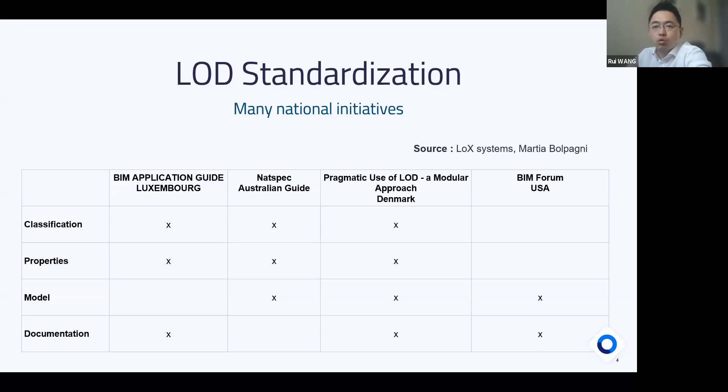So you can see there are very different definitions from different standards. But even each project or each company has their own definition of LOD. So that's a little intro about LOD. What is LOD? It's about classification, properties, model, or even the documentation.

Okay, so secondly, I want to share with you our objective about LOD, simply with the BIM&CO experience; we have been working on this topic or this technology for about 4 or 6 years. So firstly, the objective about LOD: it's a set of data by profession. That means each profession has different information requirements or even geometry requirements.

For architects, engineers, construction, or even project developers and project owners, they have different definitions of the information requirement. Each profession, even for the same object, will need different geometry and different properties. Even for the maintenance stage, they will need documentation to do the installation and maintenance of the objects. So that's one of the objectives. It's a set of data about different professions.

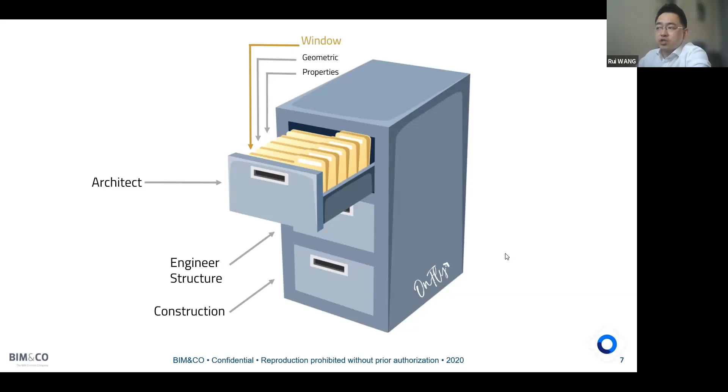So the second objective is to define the LOD as a set of data by project phase. That means, of course, maybe you are all doing projects, so we all know that across the different stages, from the concept to the design to the operation, even the maintenance, we need a different level of development of the content.

So how can we manage, during the whole project or for the same model, the different LODs with one platform, or how can we follow the change of LOD during the project life cycle? So we are looking for maybe a solution for a common data environment, etc. So let's talk about the problems we may have.

Firstly, we understand what the LOD, the level of development, is. Then we see the two objectives. We define LOD, we need LOD for different professions and for different project stages. We all know today that there are many existing standards or definitions about LOD. So that's the first problem about the LOD.

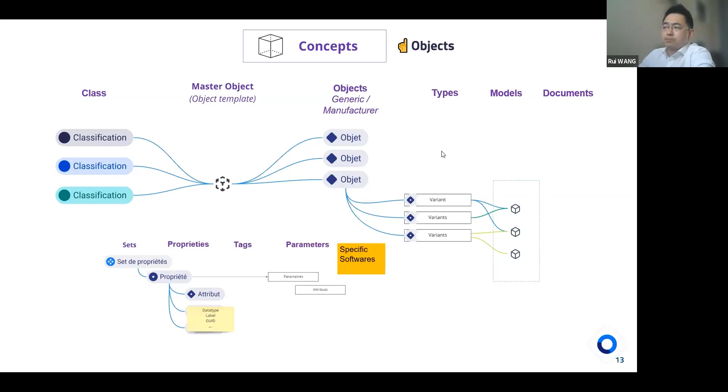So how can we deliver a master object into a project? A master object can be very complete, but of course you can enrich it stage by stage, even project by project. For end users, we are developing different plugins, such as a Revit plugin, Tekla plugin, Rhino plugin, etc. With these plugins, you can easily get your model with the combination of LOD information you need. You select the LOD, and then you get the different types, even from different classifications, the right property information, and the documents linked to a product, all from the master object.

So at the project level, our vision is to deliver the right object with the right information to the right people at the right moment or stage. That could be an interesting shared environment for everyone. We have different roles: BIM managers set up the definitions of your LOD, and end users just select the LOD level and get the right data and the right geometry into their project. So that's our vision.

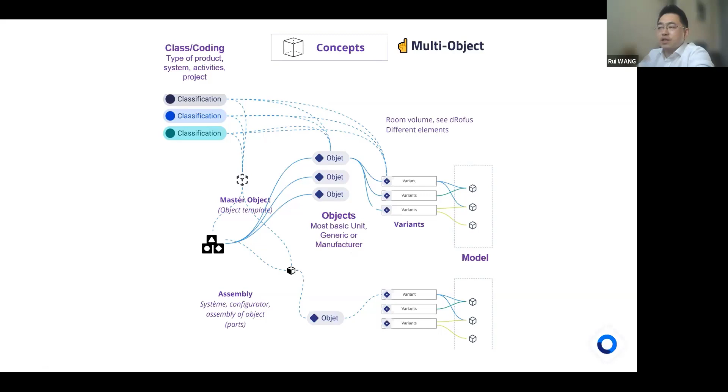Then I want to share with you how our solution looks. Firstly, in our solution, we have a feature named property set. Using this set, we can define the LOD as tags.

You can set a property set, name it level of development for example, and give different tags for LOD 100, 200, 300, as subsets to attribute the different needs or different level information, geometry, or document you need for your property set LOD. So that's the first step, defining from the high level what your concept is.

Of course, the tag is not only used for LOD, but can also be used by profession, by discipline. You can define this property set for electrician, this property set for architect, so the right person uses the right property set and gets the right data. That's all up to you. Today we're showing an example about LOD since we're talking about LOD.

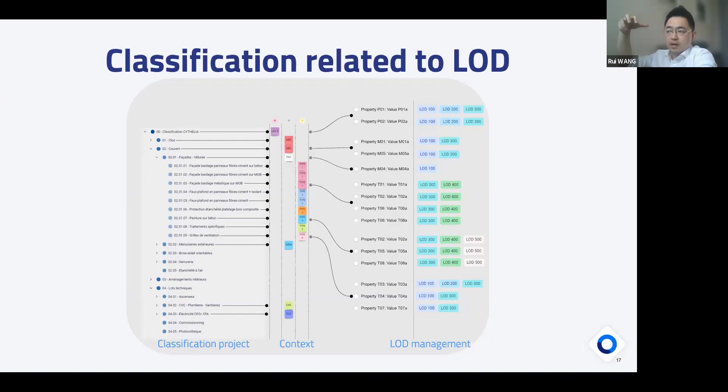It could be used by business, by project developer, and also we have clients in construction companies. The classification could be a very dynamic tool to link to your level of development about information.

And the level of development isn't only about information - it could also be about geometry. So with Onfly, we can attribute the LOD to your model as well.

For example, this is the interface for one object in Onfly. From the model option, you can find there are 3 models linked to the same object, and you can attribute them - this model is LOD 400, another is 200. So you can also add the tag by this LOD definition.

This means you can easily filter from the very beginning the library, filter your required LOD with the right model and also with the right information. You can link with different software formats. For the very beginning, you may need a LOD 100 model done by ArchiCAD or SketchUp, but you can also link a SketchUp model, upload it and define this LOD 100. Then from the next project, another person who wants the LOD 100 model from the SketchUp file format can select LOD 100 and get the right SketchUp format. I'll show you later on live how we can manipulate this feature.

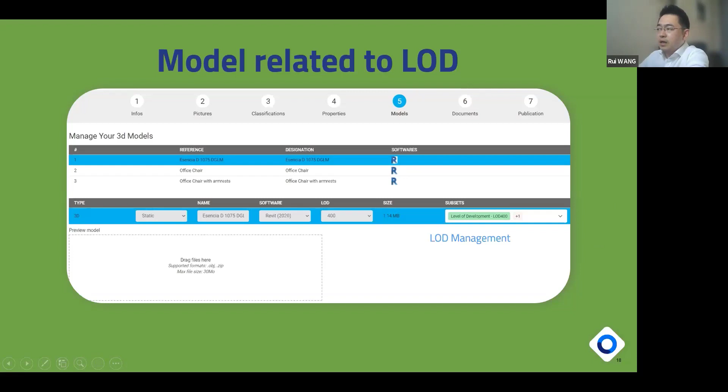Next step is level of development. It's also about document. For example, if you want to do maintenance, you need to link some document or even some manufacturer product information or product website into your object. So that possibility on Onfly - you can link or upload an existing PDF or Excel to explain your object with a document. Here is an example.

We can set a URL. Here it's a French manufacturer, so we link this product website for my object. So this object name, and then we can attribute also in the LOD 400, LOD 500. In this level LOD, I can find this document. If a user wants LOD 200 or 300, they won't find this document because there's maybe no manufacturer information yet at that level. So that's how we can link a document to different LODs.

So that's the overview about what the library looks like. Here is an example about the main interface of Onfly - an interface showing all your objects. We can centralize all your objects in one interface.

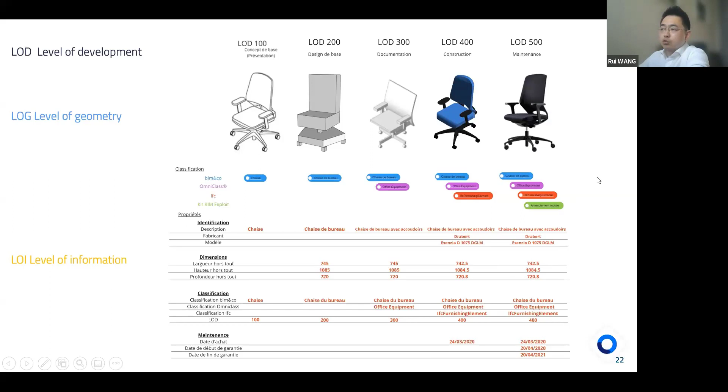Here's an example for LOD 200 with this chair. You can see this is the representation card in Onfly for this object. We have the object name and also three classifications: OmniClass, Revit category, and the BIM&CO classification.

The creation date, etc. And here you can see from the property set, when you select LOD 200, you will get the information filter, and also a 3D model linked to LOD 200, because you have done this in the very beginning at the object creation stage.

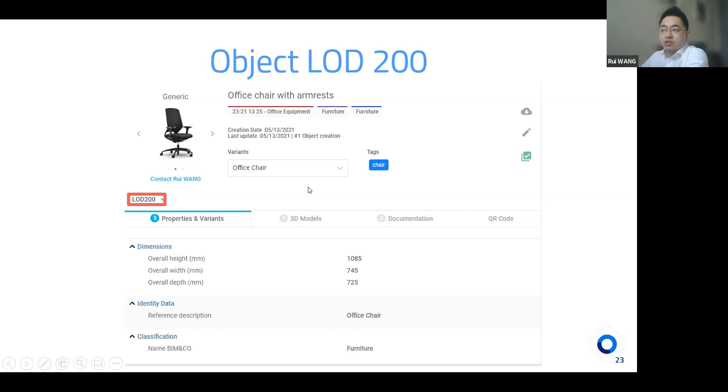You can see there's no document at this level because I only know this office chair. For LOD 300, I already know I need an office chair with armrest. Then I can add a new classification and another model for this office chair about the armrest.

And still there's no documentation because there's no need at this step. Next, for LOD 500, I can filter the manufacturer type already with the product name and all detail about this information. All the different LOD levels are linked to the same object, so with LOD selection, you can filter the different information and model documentation. Here you can see one document linked to LOD 500, and the dimension will be more detailed, and you can have a manufacturer product link and maintenance data.

So that's how Onfly manages this kind of LOD. You can also have the OmniClass classification, etc.

Now I will show you live how it could look on Onfly. Just before I show you, let's do the poll later. Here you can see my screen.

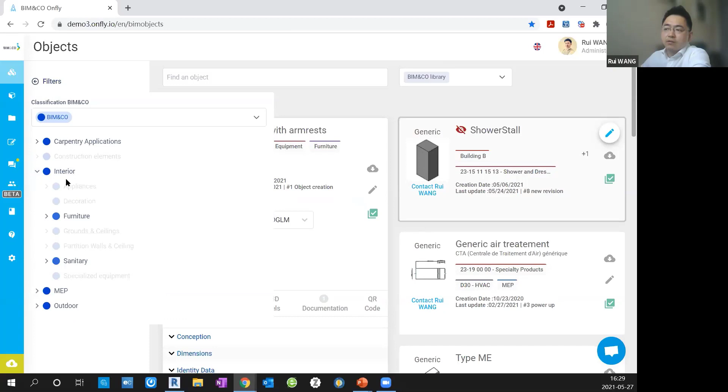Even Revit category. So if you want to find an object from BIM&CO class, for example for furniture, I just click the furniture class, then there are only 2 objects that appear. That means only 2 objects in this class.

And then, of course, you can search by properties, by software format, by manufacturer name, and by LOD. So if I want to get a LOD 400 object, only this object in this class has the LOD 400 model.

Okay, let me show more about this object, the definition about LOD. For example, here you can see from properties & variants all the detailed properties about this object. But you can see there are different types.

From the very beginning, I have an office chair linked only to LOD 200. For this detailed type, I can have all the detailed information. For this office chair, I can have another data set. This data is not detailed, so no mass, no manufacturer product link, etc. But for the product type, you can have all this information, even the maintenance.

It's the same way we define the LOD. So from the property set, you can say I want a LOD 500 model, and it will filter by all the LOD 400, 500 information. If I want LOD 100, for example, the properties will be filtered only by 2 principal elements: the reference and the classification, because we don't have any model for this LOD.

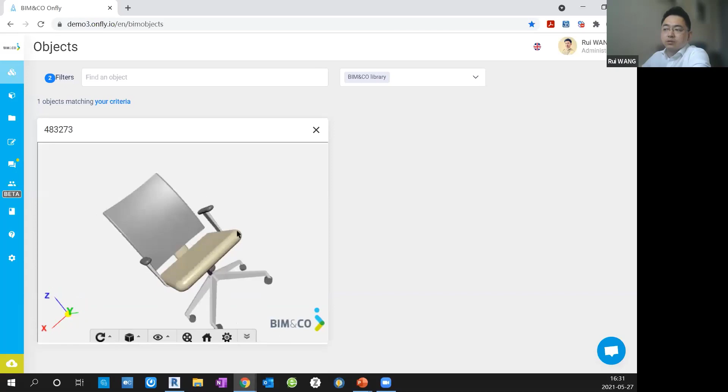Of course, you can have here, just as I mentioned, if you select LOD 300, you can have a LOD 300 model. Okay, so if you select the LOD 400, then you can have the LOD 400 family. And then you can also visualize this family online before you download it. Okay, that's a 3D viewer linked.

And then for this level, LOD 400, for example, 500, they have a document about this object. So the document could be an integrated PDF, or could be a URL, a link. So you can access directly the manufacturer brochure or installation guide, etc. It's up to you to define this.

Okay, there's also a QR code you can use maybe for maintenance. I mean, if you are looking for this object, you can scan this QR code and find all the details about this object. Okay, that's the main interface in the cloud.

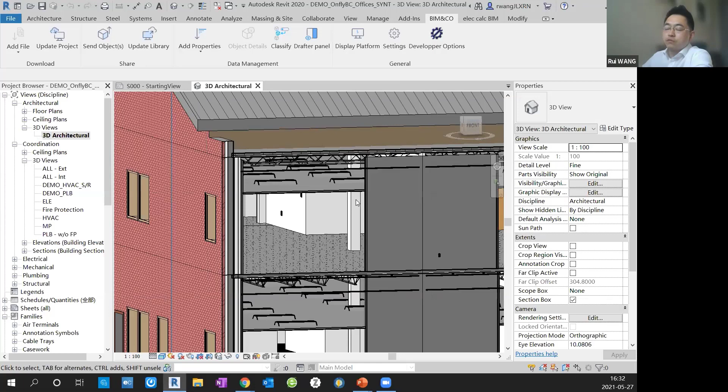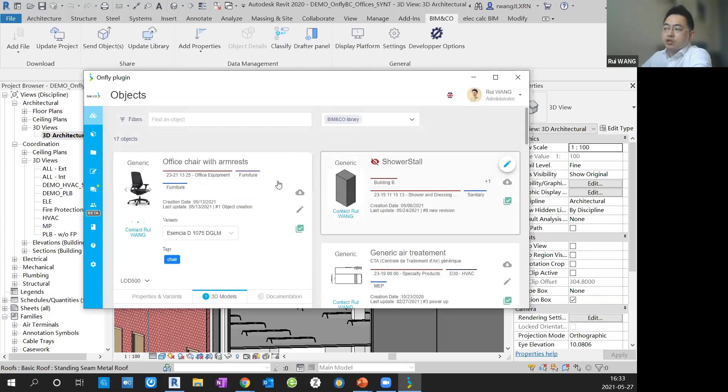So here I want to show you the last point, for the end user, how we can use or deploy this LOD. So there's a BIM&CO plugin. From this plugin, you can have a display platform. So here you can have the same interface as the web application. So this is a plugin. Then you can do the filter. You can also do the selection of your object.

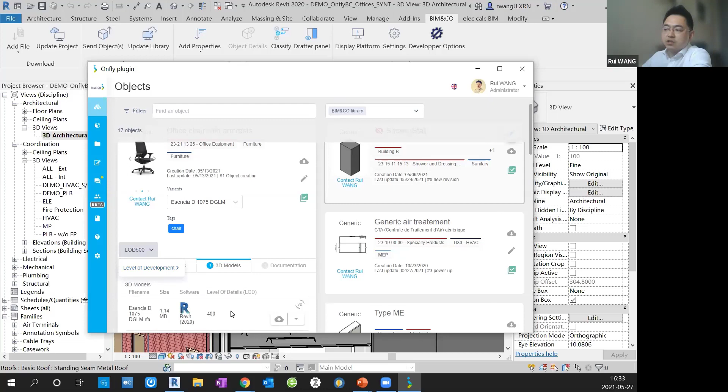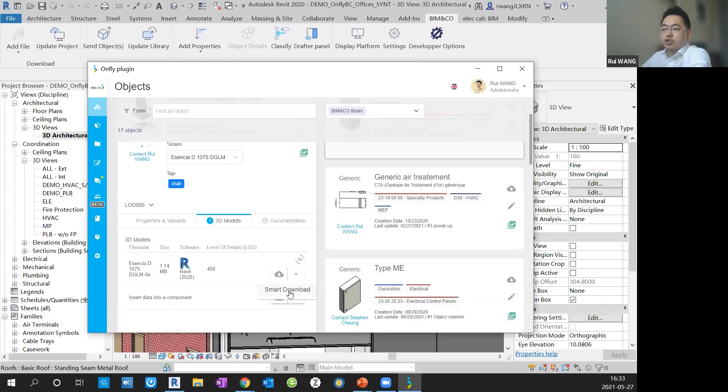Here I said I want the LOD 500. Then I can select the 500. I can get this model. And I can also visualize this model from the plugin. Okay, that's what I want. Then for the LOD 500, I can download directly this object with LOD 500 information and model. So I have a smart download.

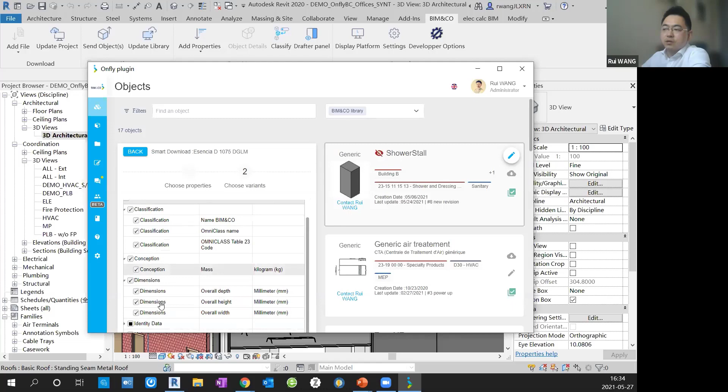That means here you can have a step to pre-select all the information requirements, all the property requirements by the LOD 500. Okay, so you can see even the maintenance properties are selected. So I go to the next step. You can even select the different types. So for your maintenance stage, you select only the type from your manufacturer, for example.

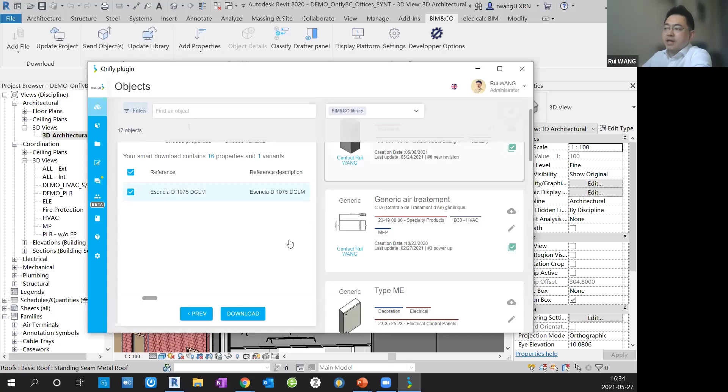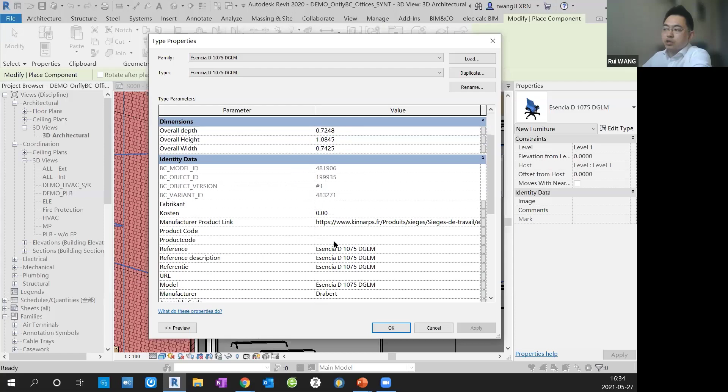Then you can download. And then this model with the right information and document link URL, you can insert into your project. Okay, so you can see we have only one type for this object, but we have all the information about this manufacturer object, the detailed dimensions, and also the URL link to the manufacturer, even the maintenance information. Okay, that's how it works at the plugin level.

Yeah, that could be all about today's topic about LOD. Of course, if you want to know more, I can show you more about property sets, how we do the property set.

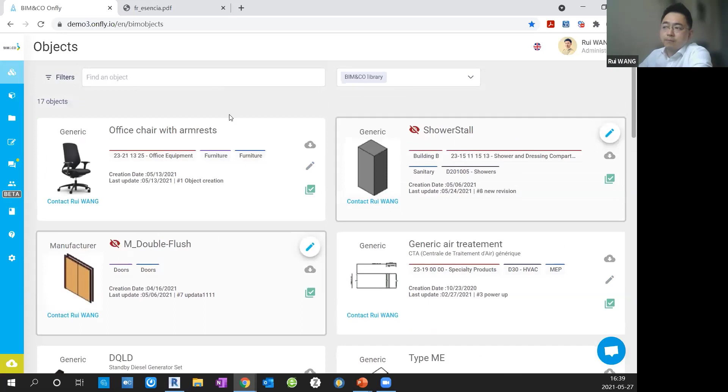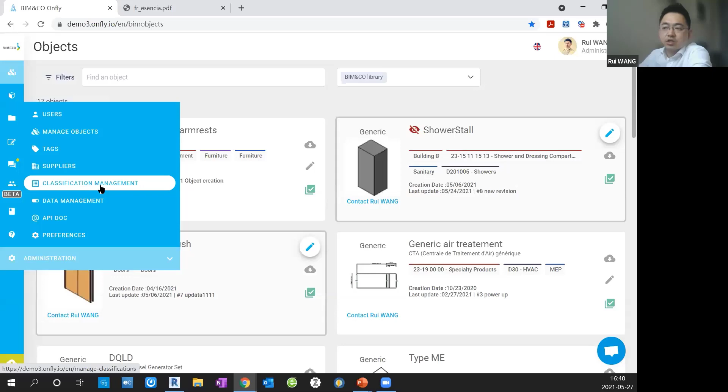But the interesting thing is for an administrator. So if you'd like, we can set up a very detailed meeting to share with you how other features work, how we can define the user role, how we can define the supply chain, how we can manage the classification like this one, how we can do the property set, like level of development.

It's one use case that you can attribute for different property by different tag. There's also a lot of interesting things, for example, you can create a common workflow about content request. Then you can standardize your information requirement internally for your team.